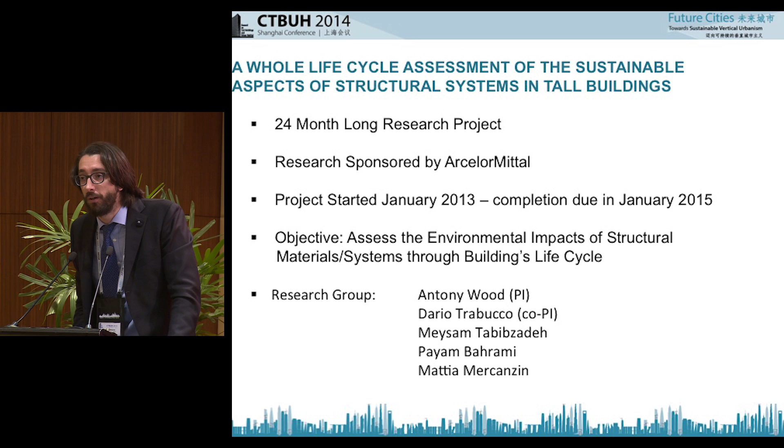The objective of the project is a complete analysis to assess the environmental impacts of the above-grade structural system of a tall building through the building life cycle. We will see what the building life cycle exactly means. By the way, Antony Wood is also the PI of this research, and the co-PI, Meysam Tabibzadeh, has been working on this research for the past 1.5 years. Payam Bahrami was involved in the first year, and Mattia Mercanzin just in the second half of the research.

So, what exactly is life cycle assessment about? Life cycle assessment is a scientifically recognized methodology that is aimed at quantifying and then assessing the environmental impacts of our actions. We can do a life cycle assessment of this conference, of producing the microphone or a bottle of water, or of a complex product such as a building structure.

It's important to identify the impact categories of the analysis that we are doing, and we will come back to this because it's really vitally important. And especially it's important to set the system boundary of the research, to describe exactly what the research is targeted to, in order to be able to compare apples with apples.

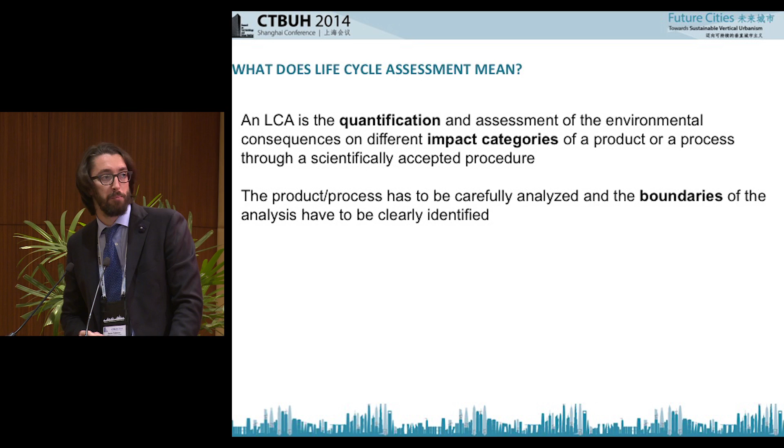There are many steps in a life cycle assessment, but there are 3 very important things that must not be neglected. First of all is to create a life cycle inventory. This is basically the recipe of the object of our analysis. So if we want to make a good apple pie, we have to know the recipe and know exactly the balance of the ingredients that we have to mix together in order to have the perfect pie.

So this recipe has to be reliable, which means that we should be confident that what we're going to do is going to produce a good apple pie, and it also has to be complete. So we have to make sure that we are not forgetting something that we may consider not important, but can actually be very important.

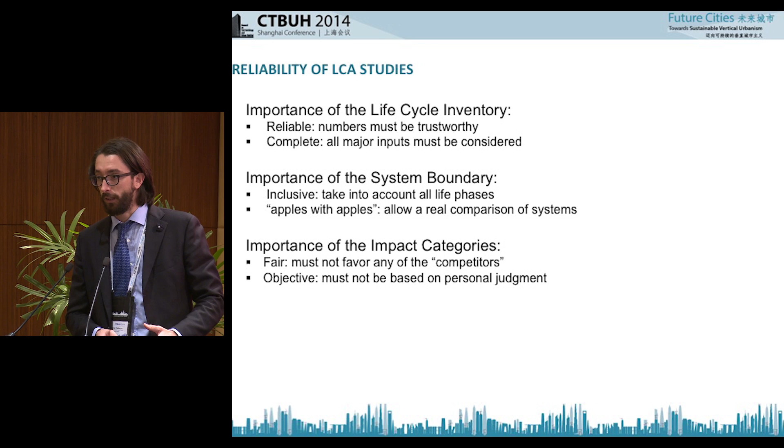Also, we need to set the system boundaries. So we need to decide and communicate to our readers and to the people that are going to use the analysis what exactly was included, because we want to compare apples with apples. If we want to consider the whole life cycle of a building, but we don't include the recyclability of the structures after the end of the life cycle of the building, we are missing something that might be very important. And it also has to be inclusive, so we have to include all the life phases of the building.

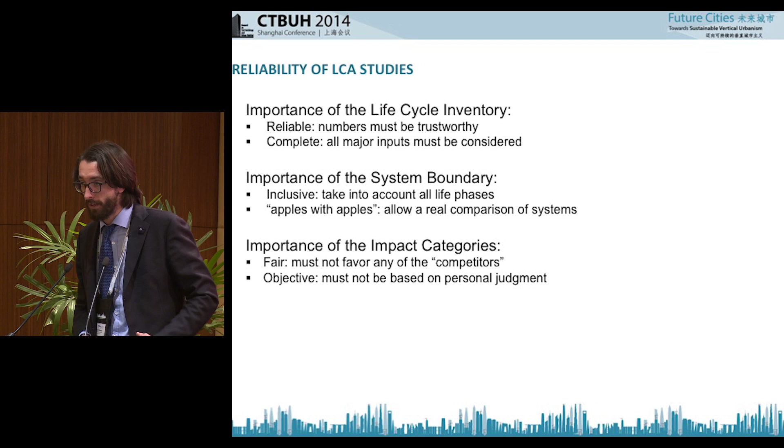And then, again, this is very important, the importance of the impact categories. They have to be fair, so the result of our analysis should not impair one of the competitors straight from the beginning of the analysis. And they have to be objective, so they have to be based on numbers that can be compared. This is higher, this is lower. We can make a comparison between these numbers.

We have seen other very accurate and specific analyses of tall buildings and tall building structures. This is going to be one of the first analyses, and we hope one of the most comprehensive analyses. Yes, because we're better than the others, but also because life cycle assessment is a very, very new methodology. And this is also very important in understanding that the results that we are going to provide and the results that we saw this morning are not definitive.

So life cycle assessment was created, as we heard before, in the 80s. It was imported somehow into architectural engineering in the late 90s. And this is a graph that shows the number of peer-reviewed LCA studies, how many times the word LCA was appearing in peer-reviewed papers in the title, the abstract or the keywords. And we went from almost nothing early in the 90s to a real boom during the last decade. So this is important to understand.

The results that we are going to present, that we saw this morning and the Council is going to present in a few months' time, are based on the current scientific knowledge on LCA. The scientific community is still working very hard to define what's the best way to understand an LCA and what's the best way to make sure that all the numbers, all the ingredients of this recipe, are included into the analysis. So the analysis that will be done maybe in 5, 10, 20 years' time might be very, very

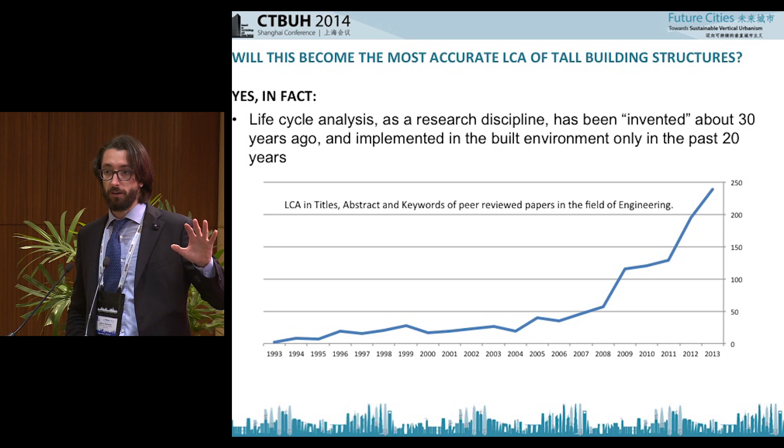different. If you think about that, the scientific community has been disputing for decades or centuries about the thermal expansion of gas or gravity or other scientific disciplines. Life cycle assessment is the new kid in town in the scientific community.

Also, what we are aiming to consider is the whole life cycle of the building and of the materials that compose the building. So what we're including in our analysis is the energy that went into the production of the material, the transportation of this material to the workshop where they have been assembled together, then the transportation to the construction site, the construction process itself, which is relevant from a certain point of view of life cycle assessment, for instance, water consumption. We are assessing the life phase of the building structure. So what is the impact of a steel structure or of a concrete structure on the life phase?

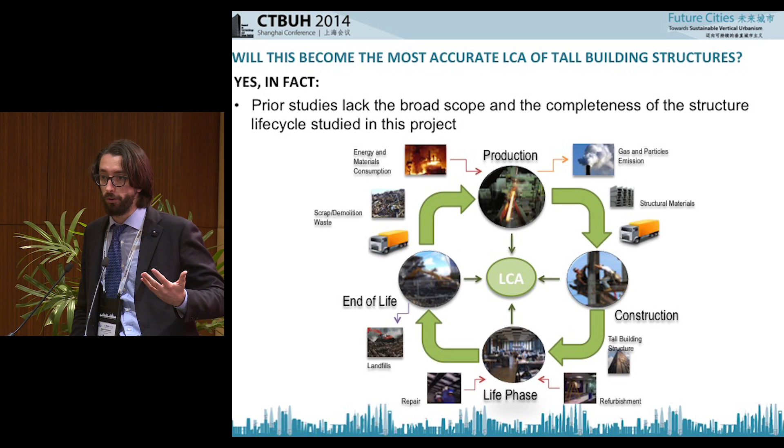And we're also including the end of life, which is not negligible at all, especially if you consider the recyclability of the materials. All materials can be recycled, steel can be recycled, concrete can be recycled too, but steel is transformed into steel. Concrete is downcycled, which means that the secondary products that you can create with the recycled concrete are not going to be concrete again. You can create ballast, you can create some kinds of aggregate. For right now, you cannot use crushed concrete to create new concrete. So we are trying to assess all these items of the life cycle.

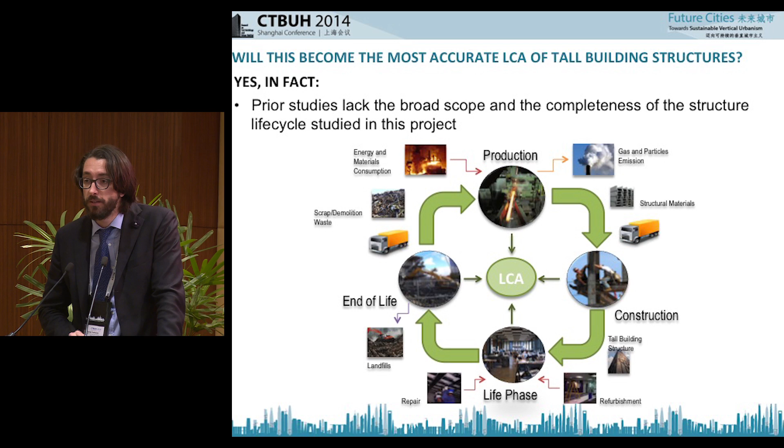And it's very important to know the exact recipe for your apple pie. So in order to be sure to include all the materials on a reliable basis, we reached out, for each of the life phases that we are targeting and studying, to the leading industries, the leading firms in the tall building industry.

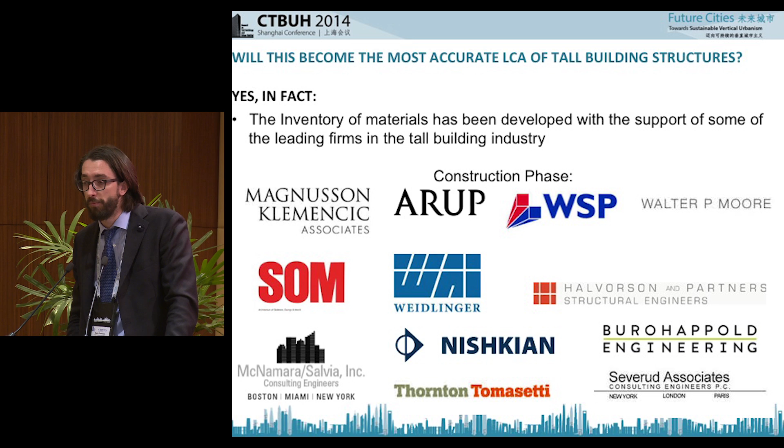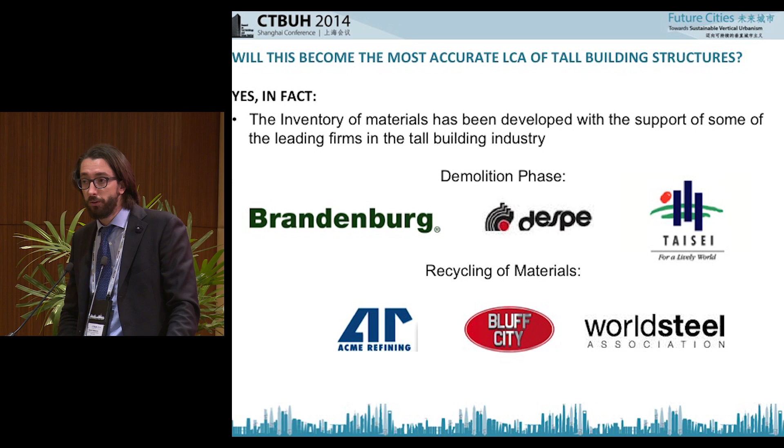So for the construction phase, which means the inventory of the materials, so how many tons of steel, how many tons of concrete, how many rebars, and so on, that go into the building structure, we reached out with a structural design inquiry to most of the leading firms in the market: Magnusson Klemencic, Arup, WSP, Walter P. Moore, Skidmore, Owings & Merrill, Weidlinger, Halvorson, McNamara, Thornton Tomasetti, Buro Happold, and Severud Associates.

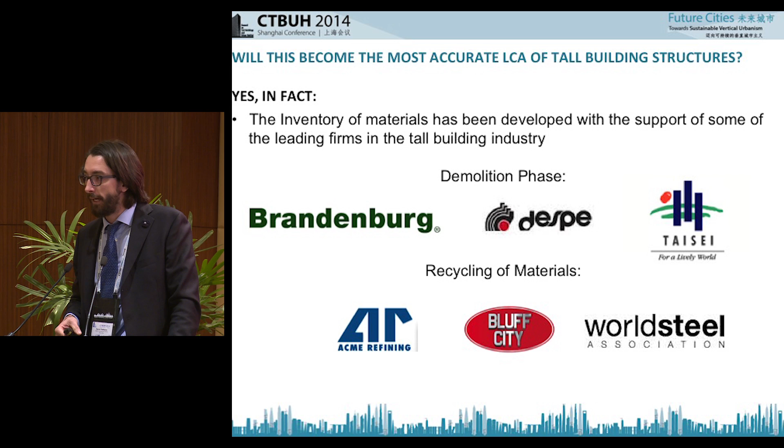These firms were contacted, they were given an assignment of designing a tall building structure for us with some given parameters, a floor plan, a height, floor-to-floor height, and so on. And they got back to us with the exact quantities that go into the design of such structures. So the inventory of materials that will be part of the dissemination of our activity is very important.

Because, of course, these are not going to be ultra-optimized structures, because we consider the real building, the 300 LaSalle case study in Chicago, and we use that building as a model for our simulations. So there might be better structures that can be made more effective if they are in steel or in concrete or composite and so on.

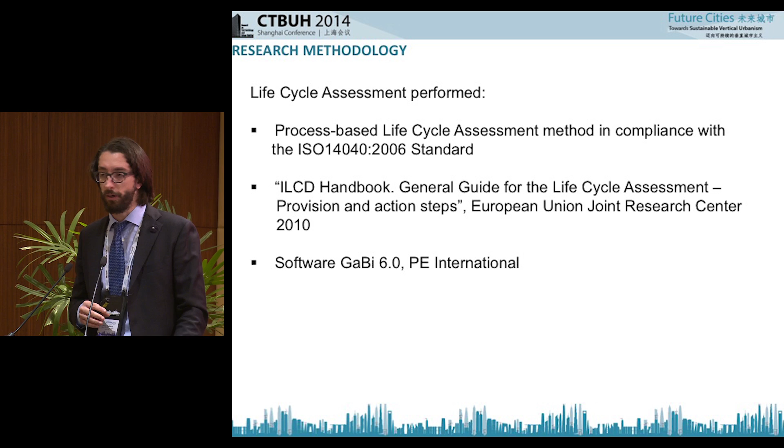But the inventory that will be released is very accurate, which means that somebody else can apply a different methodology for the study of the life cycle impact of the structure to our inventory of materials, so as to be able to compare different methodologies also.

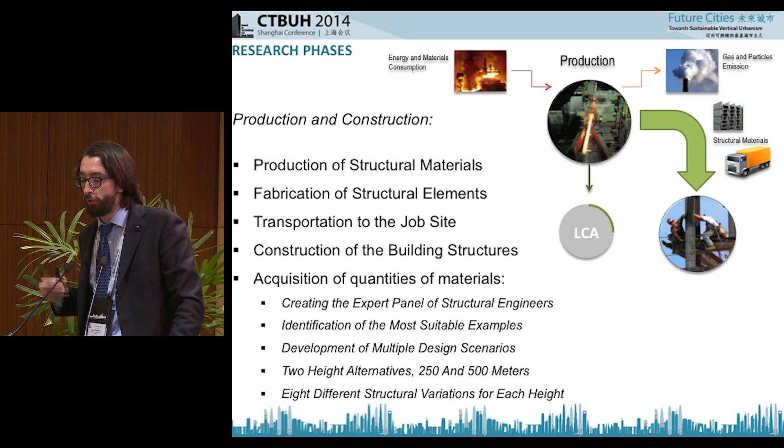The same attention was paid to the other phases of the life cycle of the building that are usually not included in most of the LCA analyses that we have found in the literature. And this is the demolition of the tall building. So we reached out to three of the leading companies in the demolition market of high-rise buildings, Brandenburg, Despe, and Taisei. And we asked them to provide us a demolition plan for the same building that was designed by the firms that we saw in the previous slide.

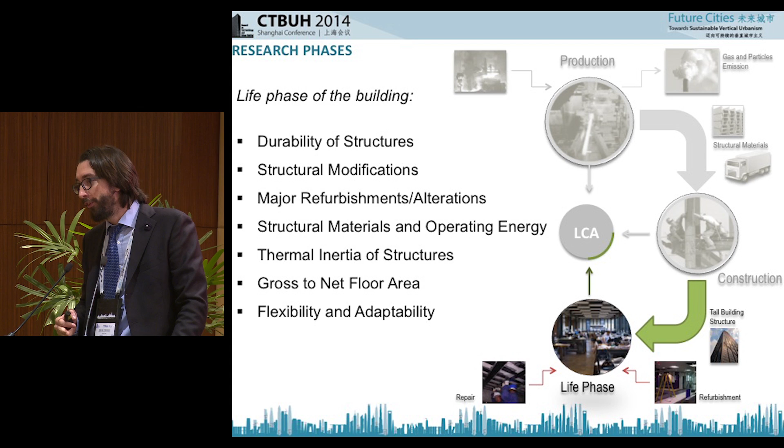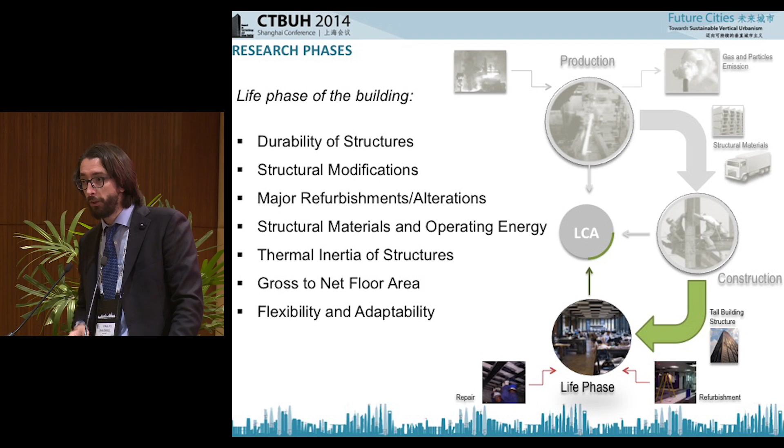So they got back to us with the energy that will be required for the demolition, with the quantity of the equipment that will be required for the demolition, and with the time that will be needed to demolish that building. And we had some very, very interesting results, and we're actually going to create a new working group on this because the demolition of tall buildings is still something relatively new.

In the world there exist right now about 4,400 buildings taller than 100 meters, and only 50 have been demolished so far. So we really are building something that we don't know how to demolish. Nobody will know how to demolish the Burj Dubai or the Kingdom Tower in a century or in 2 centuries.

And one of the most interesting findings that we got from this initial analysis is, for instance, the time of demolition. Demolishing a building takes longer than the time that was spent on construction. So if the structures that we imagined can go up in 18, 20 months, they will take approximately 3 years to be demolished. This is especially true in dense urban environments where you cannot simply blow up a building, but you have to dismantle it piece by piece.

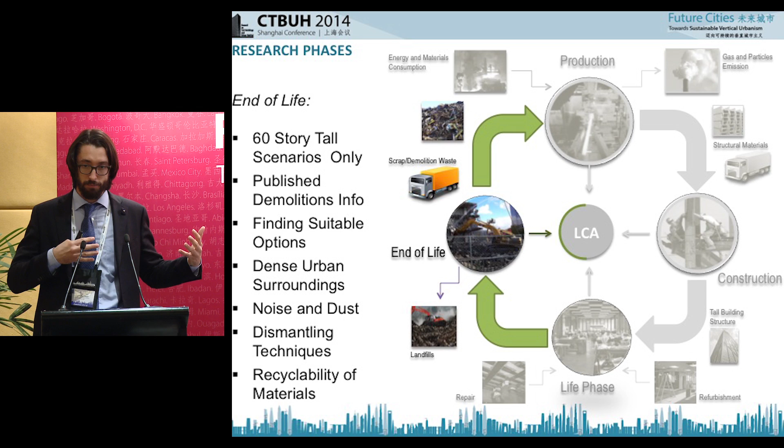You have to follow some regulations to prevent the spread of dust, the noise that the demolition creates, and so on. And of course, if you build this in concrete or steel or composite, you have different impacts because materials can be demolished, crushed, or dismantled and dismounted. So all these things go into the equation. And the recycling, of course, is very important.

So we reached out to World Steel for numbers and information on the actual recyclability of steel, and to Acme Materials and Bluff City Materials, two recycling companies in the Chicago area. And we asked them to assess what's the impact of recycling this. This also was very, very interesting.

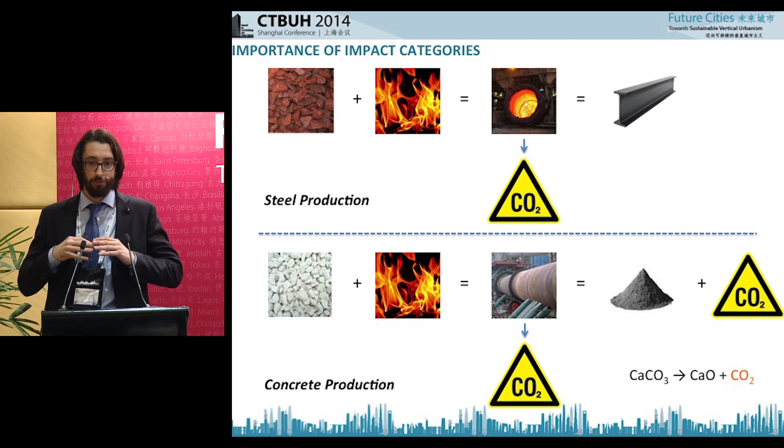We were told, yes, we can accept all the concrete that you will produce by demolishing the concrete scenario that you analyzed, but this will basically create the collapse of the concrete recycling structures around Chicago for the whole duration of the demolition. The recycling of concrete right now is so marginal that there are not the infrastructures, there are not the facilities that can accept the crushed concrete coming from such a tall building.

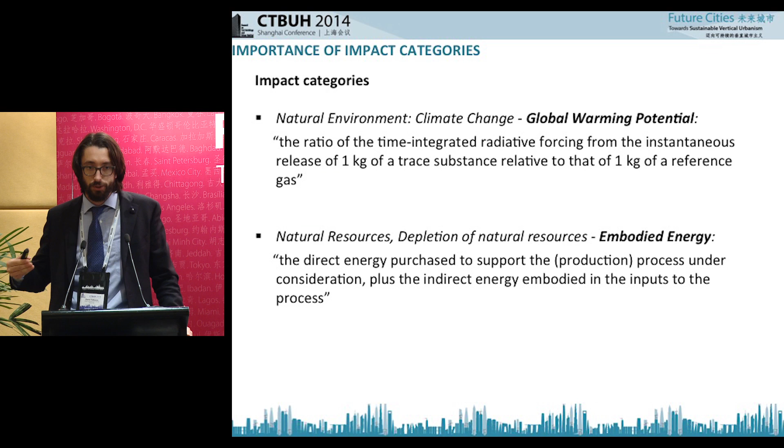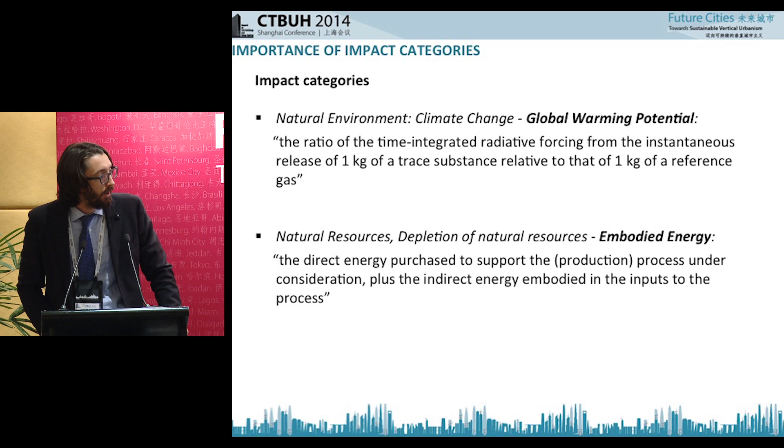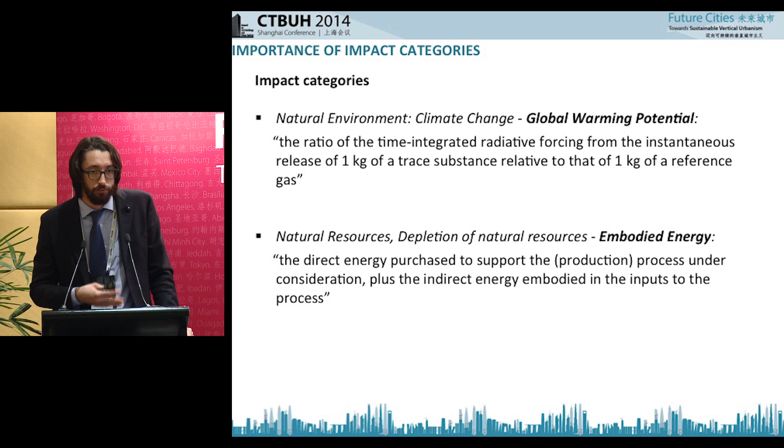So these are all aspects that architects and engineers and consultants have to consider while they design their new buildings. Sooner or later, this building will need to be demolished. So the life cycle assessment performed is based on the ISO norms that were mentioned before. There's a complete handbook that was created by the European Commission Joint Research Centre that describes every part of a life cycle analysis and everything that you have to consider while doing a life cycle assessment.

And then, of course, we use the software. There are many commercial software packages available out there. We use GaBi, which is the same software that is integrated into Tally. We considered all these phases: the production of materials, the production and construction of the building, so the bottom line of all LCA analysis.

We consider the production of the structural materials, the fabrication, the transportation to site, the construction of the building structure, which means the energy input that goes into the construction site and what the outputs of that are. And we acquired all this information, as explained before, through this panel of experts that contributed significantly to this research.

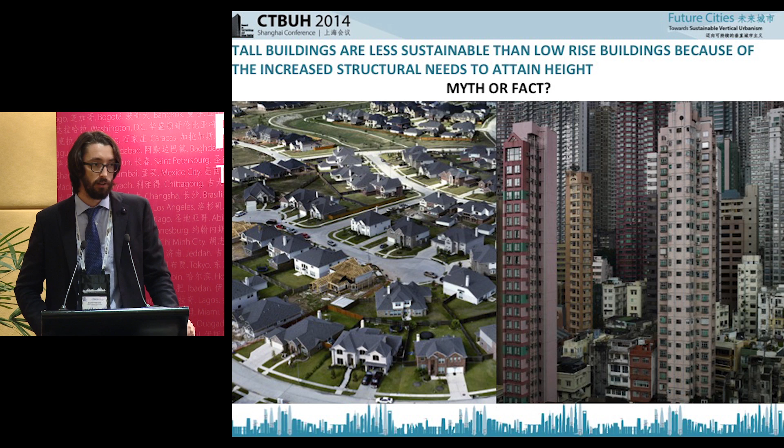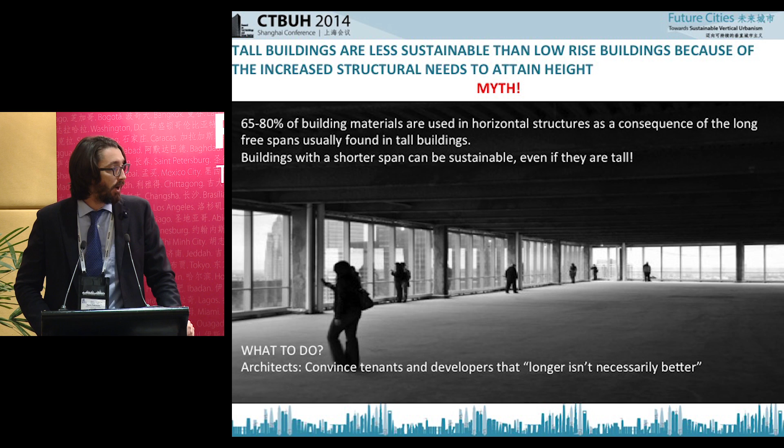The same happened for the life phase of the building. So what we are considering is the durability of the structures, which means how much modification you can do. This may sometimes not be considered an important matter in a life cycle assessment, but we are seeing more and more buildings that now need to be readjusted to maintain their value on the market.

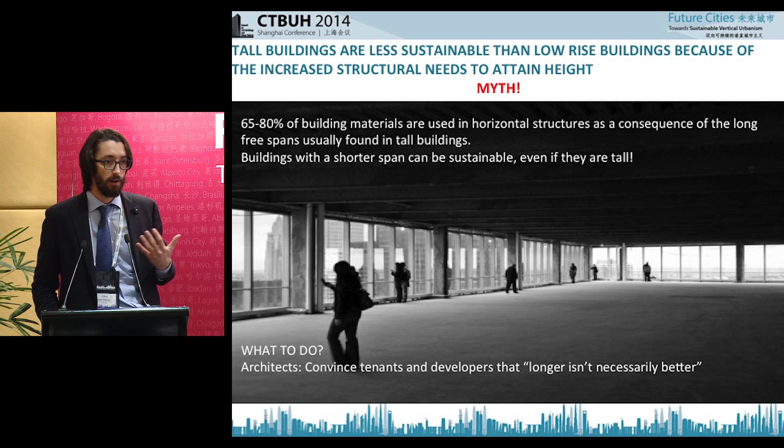Buildings that were originally conceived as office buildings that then become hotels or residences, apartment buildings that are transformed into serviced apartments and so on. All these modifications have an impact on the structure of the building. So there are certain kinds of structures that are more keen to be adapted and transformed. There are other kinds of structures that are more set in stone, so more difficult to be transformed.

We've been hearing a lot about the thermal inertia of building structures, and we are considering this, even though the initial findings show that this is not as important as we expected it to be. Of course, because all these structures are very heavy structures, the actual properties of the materials are not that relevant from this point of view.

And again, the ratio of gross to net area. Large structural elements occupy space that cannot be used for the building purposes. So if we use a structural system or structural materials that require larger structural elements, we'll probably need to build an extra floor or 2 extra stories in order to have the same net rentable area as a shorter building.

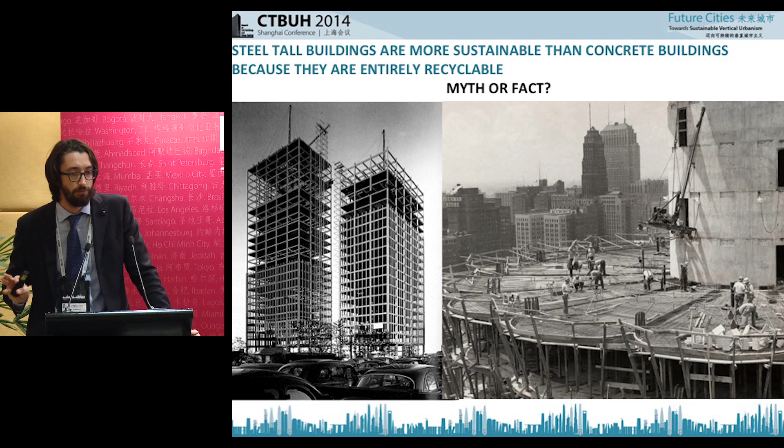Basically we consider 2 scenarios for the life cycle inventory, a 60-story and a 120-story scenario. For the demolition phase, we only consider the shorter scenario because we understood that a 500-meter tall building is somehow considered to be permanent everywhere in the world. So no one is actually considering demolishing the Empire State Building or the Sears Tower or Burj Khalifa and so on.

But there are more speculative interventions in the range of 150 to 200 meters tall that are going to stay there maybe for 20, 30, 40 years, and then they will reach the end of their usable life, and they will either have to be converted or demolished and transformed into something new.

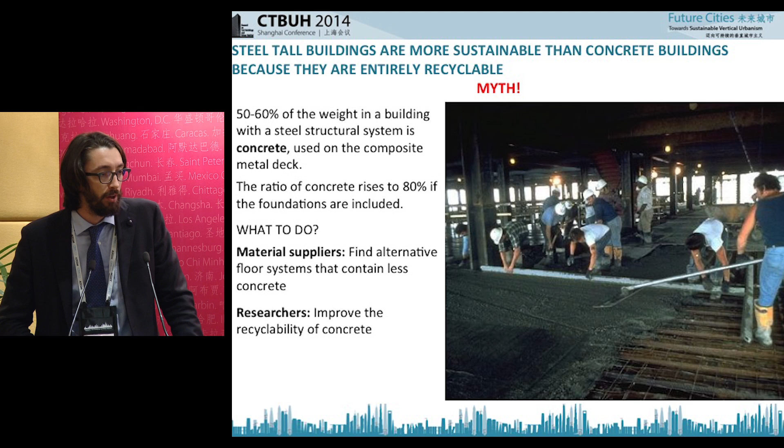So we were mentioning before the importance of the impact categories. We've been hearing this morning a lot about embodied carbon. Carbon is basically produced and released during the production process of the materials and during the transportation phases of these materials through the consumption of the fuel that goes into the factory that produces either the concrete or the steel, and into the diesel that is burned by trucks. An important thing, though, to consider is that carbon is also released during the chemical transformation of the elements that produce cement and therefore concrete.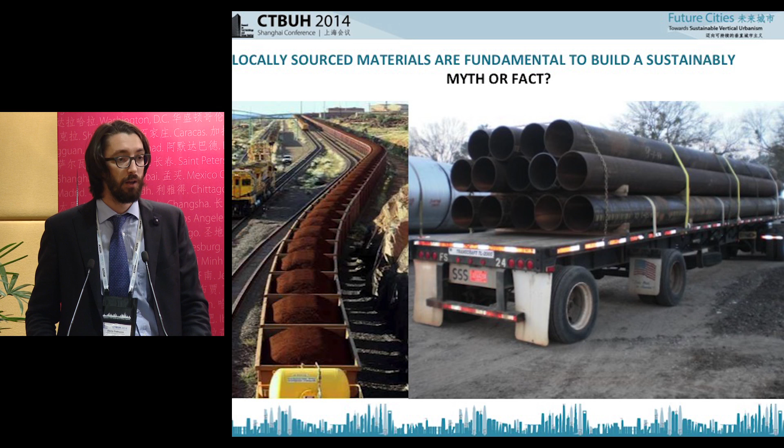So if we want to be fair with the 2 main materials, concrete and steel, we have to consider this that goes into the equation. So if you go to a steel producer, he will say steel is more sustainable because it releases less carbon than concrete per unit that you're considering. And this is indeed true. However, if you go to a cement producer or a concrete association, they will say that cement and concrete is more sustainable because it uses less energy to be produced. And this is also true.

So we cannot decide. Life cycle is very complex. You have to consider so many indicators: water consumption, depletion of natural resources. You have to consider the impact on the humans, so on the health of the humans and on the animals and the ecosystem and so on. Of course, this is still very, very debated in the industry. This morning we just heard speaking about carbon. We decided that also energy has to be included into the equation.

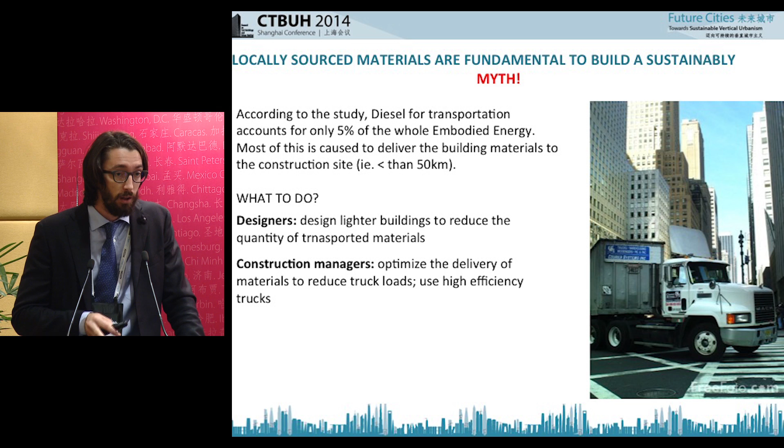So basically, the research that we are doing is based on two different indicators. One of the impact categories is the natural environment, and it is basically indicated in global warming potential, which has a very, very difficult definition, but basically is the release of greenhouse gases into the atmosphere. But we're also including the depletion of the natural resources through the assessment of the embodied energy. They're both very, very important.

Carbon emissions are considered to be the main cause of global warming and environmental changes. Natural depletion and the acquisition of energy and other natural resources is the main cause of wars, of international disputes, and so on. So we thought that these two impact categories have to be assessed equally.

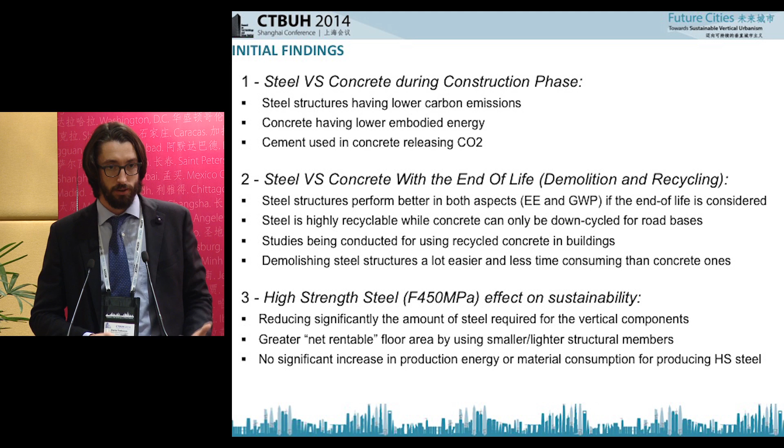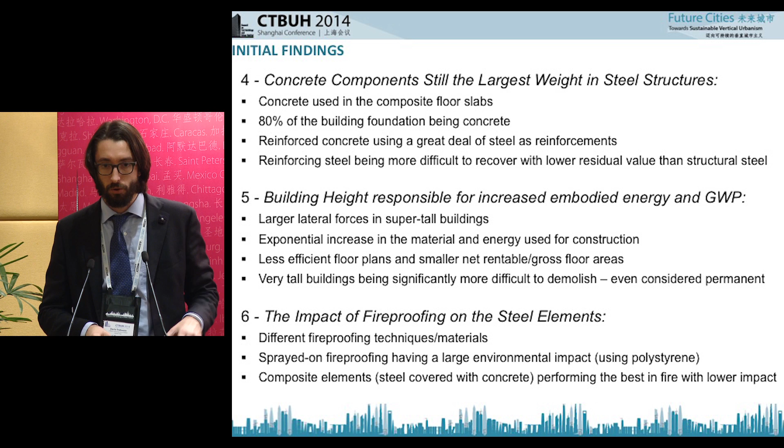I'm not going to present any actual result, because we are still waiting to have some data on the construction phase and on the recycling phase for some of the materials. So it will be not fair and not complete to present final results. But we can still think about some issues and give some guidelines somehow for the design of future tall buildings.

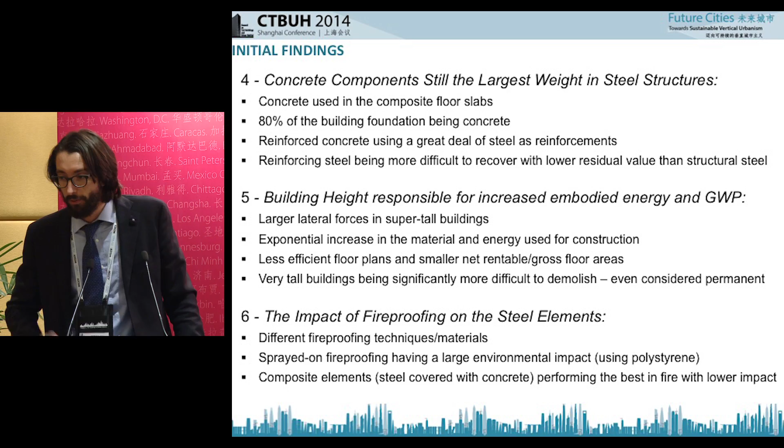So we always think that tall buildings are less sustainable than low-rise buildings because they use more structural materials in order to be built. This is actually not really true because, as we said before, and as Don, I think, mentioned before, a very large part of the materials that goes into the structure of a tall building is not for the vertical structures, but is for the horizontal structures. And this is even higher if you include the foundations. So what can be done really from structural engineers and designers is to think about and conceive better flooring systems and reduce the lease span of the building. Longer is not necessarily better.

Also, we have been told that steel structures are more sustainable than concrete structures because they can be entirely recycled. This is also not true because approximately 50 or 60% of the materials weight, even in a purely steel building, usually goes into the concrete slab that creates the horizontal system. So again, what we need to do is to convince the material suppliers to find alternative floor systems, and we need to improve the recyclability of concrete, because this is also very important in purely steel buildings.

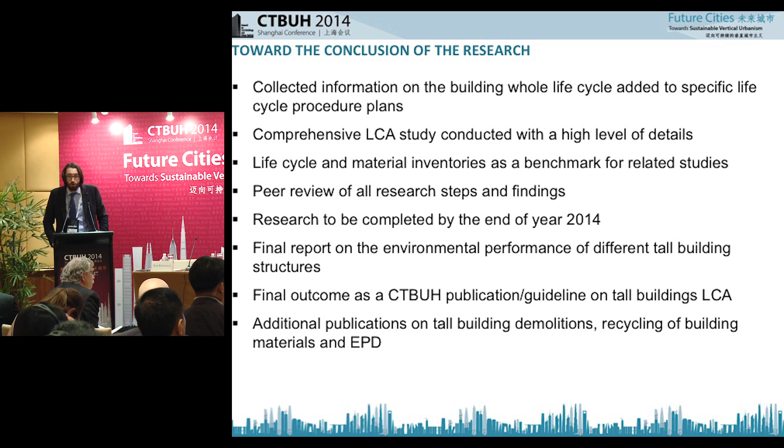And finally, we thought originally that the transportation had a huge impact on the LCA infrastructure. This is, again, not true, because according to the study, less than 5% of the total emissions and total embodied energy used by the building goes for the transportation. And a significant portion of this, about 80%, happens in the last 50 kilometers. So it really doesn't matter if the steel is coming from China or from Brazil and the concrete is crushed thousands of kilometers away, as long as it's transported to the site with trains or ships. Everything happens in the last 50 kilometers, and in all cases that we studied, this transportation happens by truck.

So before conclusion, well, there are some other initial conclusions. You can find them in the paper.